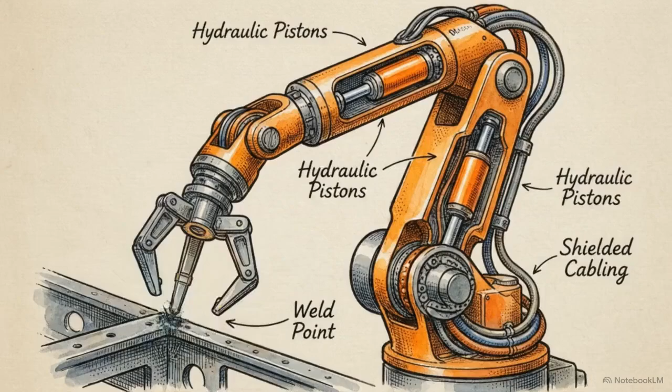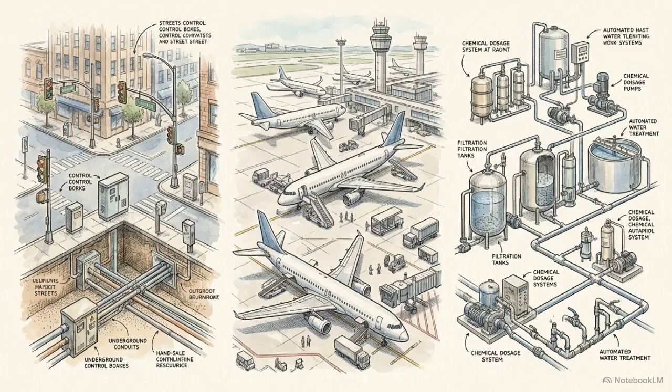Modern autonomous systems operate with a speed and precision that entirely outpaces human capability. They assemble our infrastructure, route our communications, and refine our materials on a massive scale. Yet despite the fact that civilization relies on these systems to function, the very professionals building them, leading control theory experts, robotics engineers, and computer scientists, lack a unified global definition of what automation actually is.

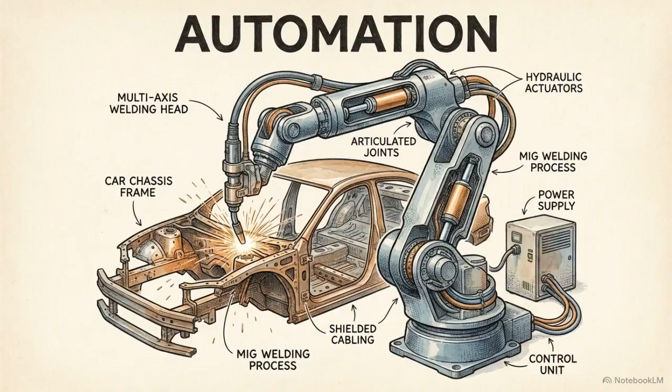In practice, the industry routinely conflates four distinct concepts: mechanization, cybernetics, robotics, and automation. The strict foundational definition of automation is a system operating or self-regulating independently, entirely without human intervention during the activity itself. Distinguishing a complex machine from a truly automated system requires identifying the specific intelligence feature, the autonomy, that separates simple mechanization from independent operation.

This is the physical or virtual architecture housing the system, scaling from a simple mechanical tool to a massive software installation. The second is the process. This represents the specific action, operation, or function being executed by the platform. Third is the power source, the physical energy or computational power driving the activity.

The final and most critical element is autonomy. This dictates the intelligence, control mechanism, and organization of the system. While platforms have scaled in size and complexity, the historical trajectory of these systems is characterized by the increasing sophistication of the autonomy node. We classify the first generation of this evolution as BAC, or Before Automatic Control.

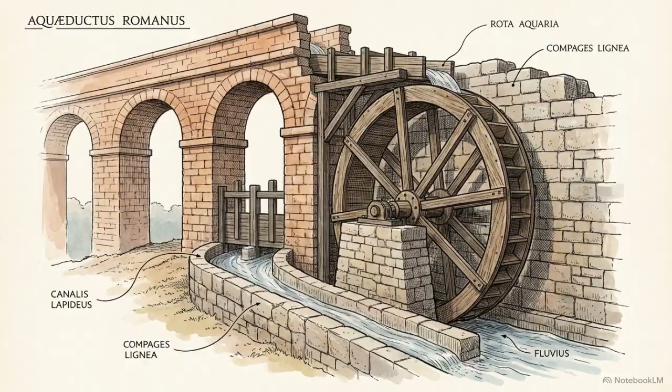This diagram maps the ancient aqueduct directly onto the automation formalism. The platform is the installation itself. The process is water flow, the power source is gravity, and the autonomy consists entirely of predetermined gates.

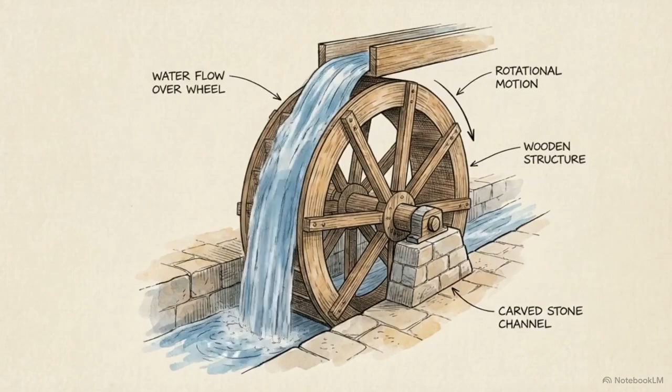The defining limitation of the BAC era sits precisely in that autonomy node. A system could turn on or off based on gravity or wind, but it could not react to changing conditions. These early systems successfully replaced human muscle, but lacked the capacity to replace human decision-making.

By the time the Industrial Revolution established the complex mechanical workflows of the factory floor, a second generation had emerged, BCC, or Before Computer Control. The engineering breakthrough that defined BCC was the mechanical feedback loop.

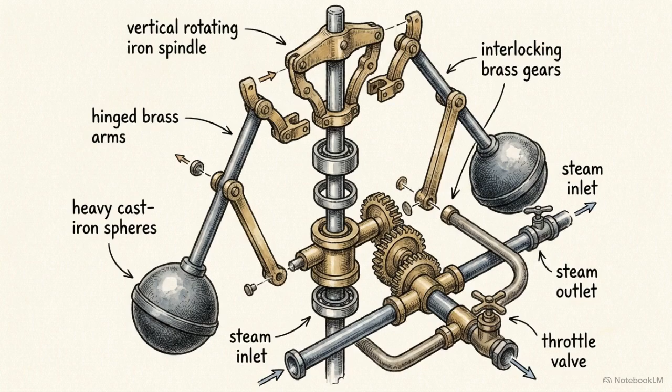This schematic illustrates James Watt's flyball governor for steam engines, a prime historical example of this feedback loop in action. Centrifugal force pushes the spinning metal balls outward, which automatically throttles a steam valve to maintain a consistent speed.

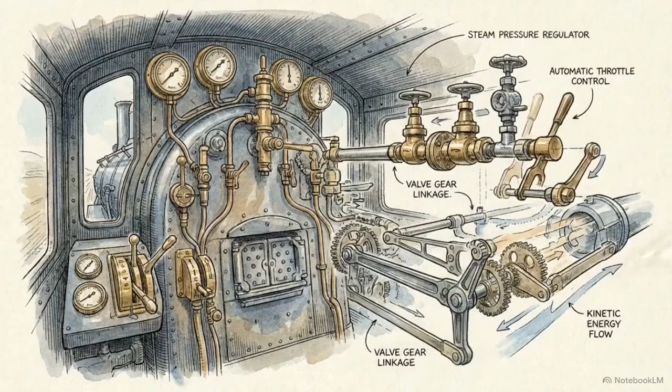Running the flyball governor through the automation formalism shows a clear upgrade. The autonomy node has moved from a predetermined state to active, self-regulating feedback. By integrating these mechanical loops, machines achieve the capacity to maintain a steady state independently, severing the requirement for continuous human oversight.

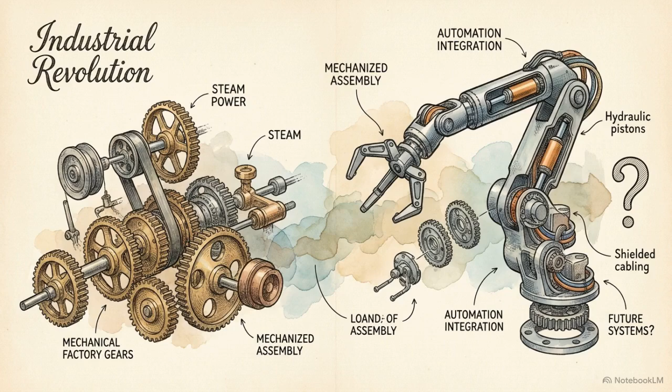If autonomous machines have operated independently since the Industrial Revolution, we must establish exactly where robots fit into this timeline. The author and scientist Isaac Asimov coined the term robotics in 1941 to describe a very specific subset of technology. The strict engineering requirement for a system to be classified as a robot lies entirely in its platform node. The platform must be a mechanical device specifically designed for manipulation and locomotion.

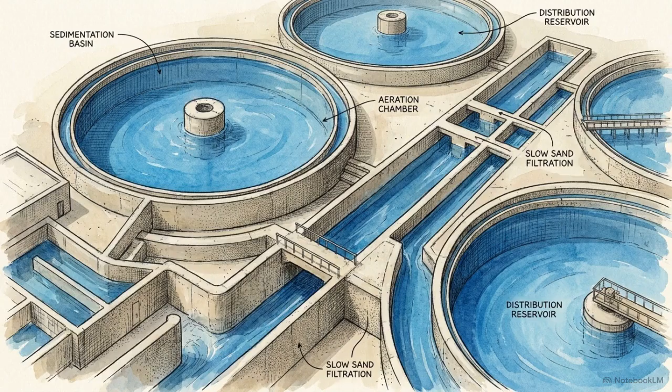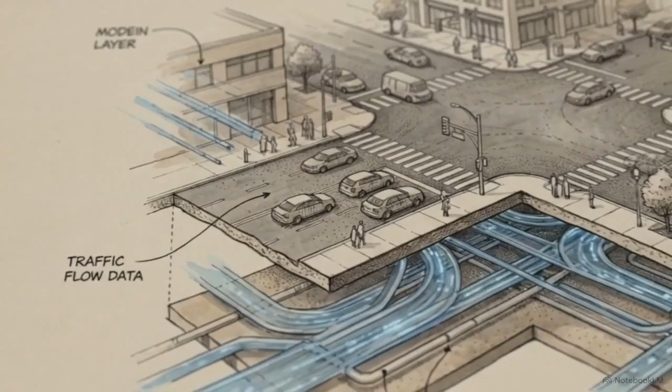Conflating robotics with automation creates a dangerous blind spot. It tricks us into ignoring the invisible, software-based automation that actually runs the modern world. That invisible architecture represents the third generation, ACC, or Automatic Computer Control.

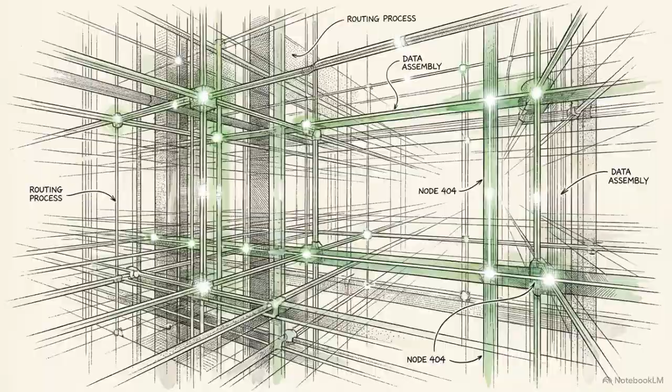The invention of the digital computer entirely removed the need for physical, mechanical feedback loops within the autonomy node. This data visualization shows thousands of distinct nodes routing and optimizing connections without a central physical mechanism. ACC unlocked capabilities where control systems became optimal, adaptive, distributed, and multi-agent.

An internet search engine fits the automation formalism perfectly. The platform is a network of worldwide servers. The process is information retrieval. The power source is electricity, and the autonomy is a multi-agent algorithm.

The evolutionary arc tracks perfectly with the formalism. Automation transitioned from replacing physical labor under BAC to replacing physical regulation under BCC, and finally to replacing cognitive routing and decision-making through ACC. The next frontier in the autonomy node traces its roots to the mid-century study of cybernetics,

pioneered by Norbert Wiener, which explored the merging of biological principles with automated systems. This has evolved into bioautomation, the emerging practice of designing control theories that mimic organic processes, system biology, and collaborative survival mechanisms.